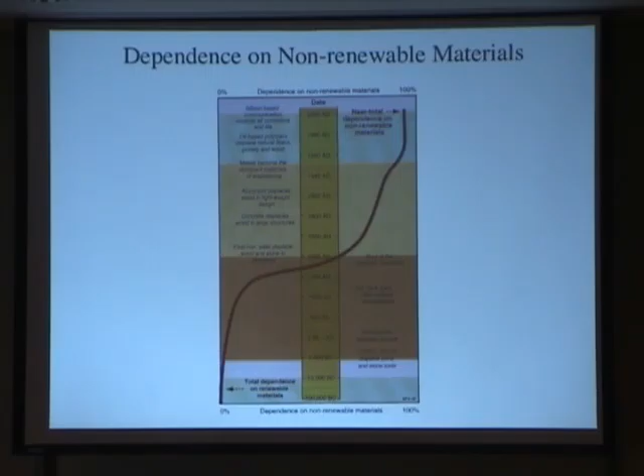But today, what I really want to focus on is, what does the material scientist do? What's our role in energy consumption? We'll see a couple of examples, and I'll explain some methodology. So first, we'll start with a quiz.

So this is a bottle of an imaginary spring water, Alpure water, invented by Mike Ashby. So here's what we're going to do. Here's this bottle, right? We're going to synthesize the polymer, then we're going to mold it into the shape of the bottle and, of course, the cap. We'll take the empty bottles, we'll fill them with French spring water, we'll drive them 550 kilometers to Cambridge, England. We're going to refrigerate it and serve it to Mike Ashby at lunch, at high table, and then recycle the bottle.

So my question to you is, filling itself doesn't require much energy, right? But in terms of these others, where is the big energy hit? So I'll call for some votes. Now, by the way, everyone agrees that recycling is good, so we'll come back to that. We're going to make the polymer, mold it, ship it, and refrigerate it. Those are your four basic choices.

How many votes for synthesizing the polymer being the big energy cost? How many votes for molding it, which is a thermal process, molding it into a bottle and cap? Okay. How many of you think that shipping it to Cambridge in a truck is the big hit? And how many of you think refrigerating it matters? So you're a good audience, because a year or two ago when I did this quiz, everyone would vote for the truck. They said, brain dead, driving it in a truck, 550 kilometers.

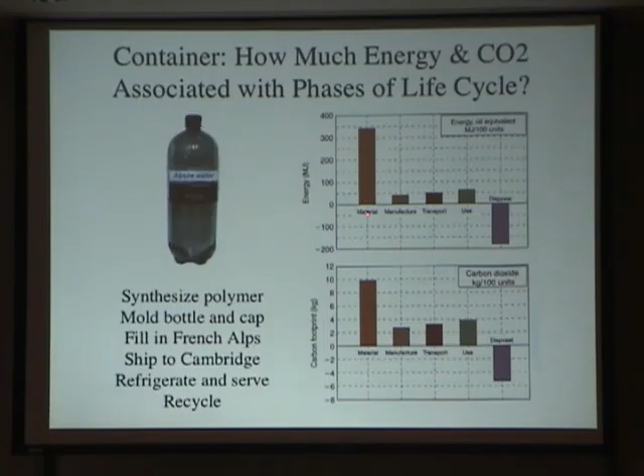So it turns out if you do the analysis to about 1 digit of precision, making the polymer, synthesizing the polymer in this example is the big hit. You know, these polymers are directly derived from fossil fuels. So you are, by the way, not burning the polymer, right? You're not releasing all its CO2 to the atmosphere. But this thing is basically made of fossil fuel. Making it into a bottle is there, but not enormous.

It turns out, if you load an 18-wheel truck, even though it seems crazy to drive water from France to the UK, the energy hit's about that big. This is the refrigeration. Putting the stuff in the refrigerator and cooling it down for a day or two is more energy than it took to drive it from the French Alps. And we can convert this into the equivalent carbon dioxide emission, and these are both for 100 bottles.

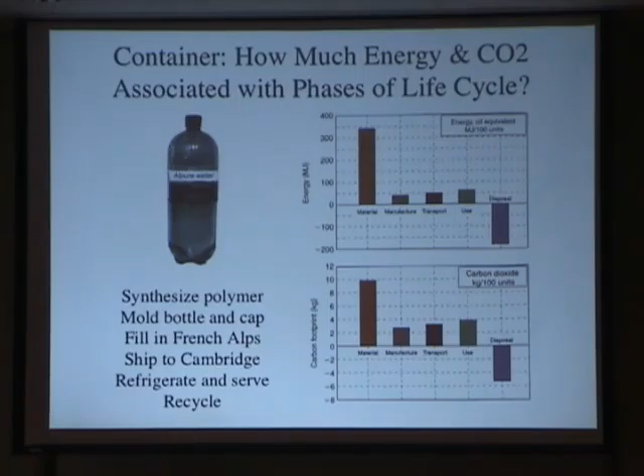By the way, there's a credit over here. This represents the credit that the next person would gain if you could recycle the polymer. In other words, this negative figure represents energy you would not need to commit to reuse that polymer. You do commit some energy to collect it, chop it up, soften it, and reprocess it. I will later explain where these little charts come from. They actually come from a piece of software that Ashby and Company have created, which is very powerful.

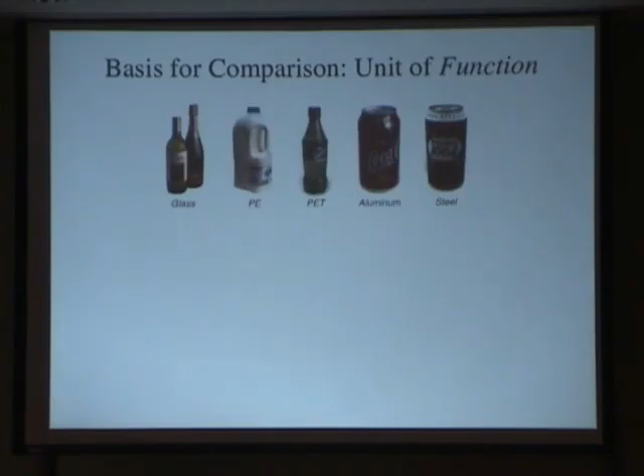Well, one point, I may be preaching to the choir here, is how do we compare choices? So we talked about a bottle. Here are a variety of familiar bottles made with a variety of familiar materials. So if I push the button and say, look, if you're an energy person, we should talk about the energy consumed to make these materials. Here is the energy to make 1 kilogram of polyethylene terephthalate, polyethylene, glass, aluminum, and steel. So you look at this and you say, glass is the winner. I love glass. But will glass be the winner?

So the question is, really, per unit of function, which is holding liquid. So an aluminum can, you know how thick the walls are in an aluminum can, right? You can just crush it in your hand. How thick are the walls on a glass container? Right? Much, much thicker for mechanical reasons. So if we convert this plot into the energy of material needed to make a bottle to hold 1 liter, this is now the comparison. So glass, which was here, jumps way up simply because of the necessary wall thickness.

Interestingly, our all-time winner is steel. This is steel with a very thin lacquer coat to make it not corrode. And steel is recyclable. It turns out in this study that our friend steel comes back several times as a surprising winner. However, there is one other property not listed on the slide which makes glass different from all the others.

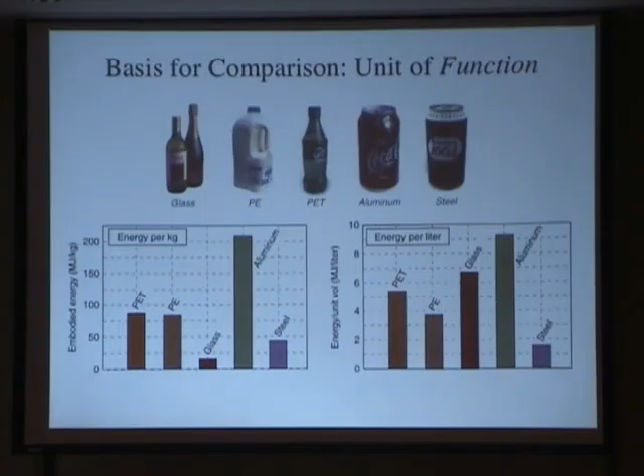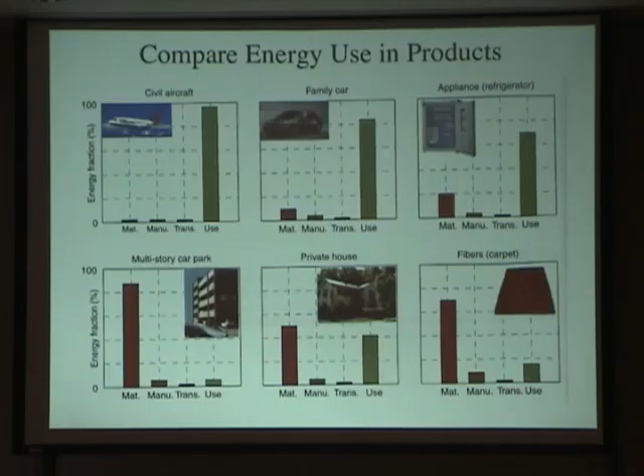And the comment here is related to the question of life cycle analysis. It's very easy to encounter life cycle analyses where the viewpoint, that is the input and output gates, surrounds one piece of the process. For example, I go to Boeing. I draw a mental line around the Boeing plant, and I say, how much energy do you use? That viewpoint would lead you to say, well, boy, you better not up your energy consumption by a third fooling around with these engines. But you'd have the wrong answer. The LCA must surround the entire question of system use.

Now, what do we do in the class? How do we approach this? Mike Ashby and a software house, which has been around 20 years now, had long since had a database of materials properties for engineering. What they've done in the last 10 years was to put in what they call eco-data, derived from a variety of sources. There's a lot of interpolation. It's actually done with a careful statistical method to look for data that are outliers and not accept it naively.

So the current range of numbers is around, the average is about 220 megajoules per kilogram. So how do we think about that? Let's take a familiar unit of energy, the kilowatt hour, right? Here's your toaster. It's 1,000 watts. You turn it on, click, gets real hot, and you leave it for an hour. That costs you 10 cents. That is 3.6 megajoules. So we're talking here something like 70 kilowatt hours.

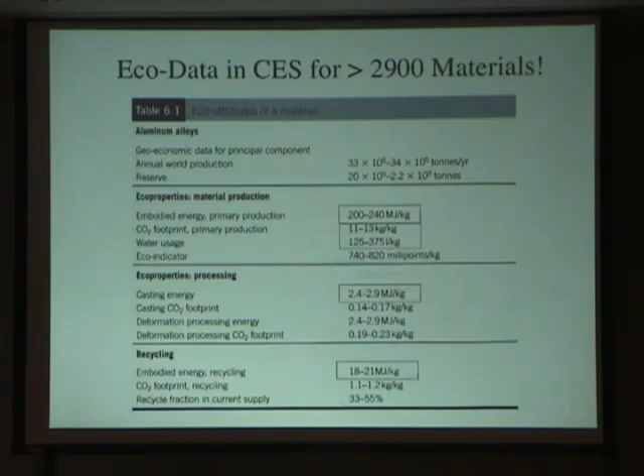Now, this is the longest slide. I have to lay out the steps in how we would figure out our problems. This is phrased in terms of, suppose we were designing something or redesigning something. So consider a proposed object or system. What do you need? You need a preliminary design that achieves the function, right? I'm building a bridge. I'm building a race car. I'm building a solar thermal Trombe wall, right? Okay? And sets necessary constraints, right? How big, how stiff, how heavy, how much thermal conductivity, whatever the constraints need to be. And I break it down into its components, and now I have to say, in engineering terms, what do I need?

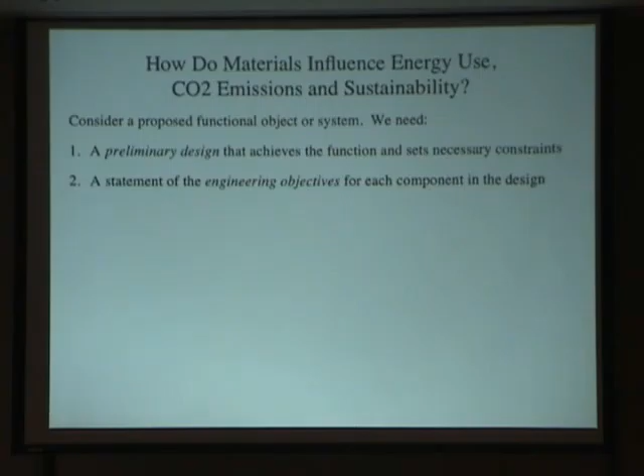And here's the interesting part. You need a methodology, which I'll show you in a moment, to calculate a figure of merit for each component. How would one material work versus another? So it turns out you almost invariably end up using certain ratios of properties. Occasionally use single properties. A lot of things are ratios. Once you've done that, can we also convert the figure of merit into an ecological implication, like embodied energy, CO2 footprint, even water consumption? And then trade off, because in part 3 you were an engineer saying, okay, I'm making this as light as possible. And in part 4 you were an ecological engineer saying, hold it, let's keep that embodied energy down, or keep that CO2 footprint down. And these will not, in general, have the same solution. So what do you pick that makes you pretty good in both?

And finally, we've already seen examples. We need a method to estimate in advance what a life cycle cost would be. Traditional LCAs are done on already existing systems that have been functioning. So you analyze after the fact what you did. But for design purposes, to move forward and make progress, we have to anticipate to maybe 1 digit of precision. Right? Is this new design really greener than the old one? Now, even if the numbers we have available only have 1 digit of precision, if we're going to make a difference, our new designs have to be not 5% better than our old designs, not 10%, but like a factor of 2, or at least a factor of 50% if I'm going to bother, right? So we will be able to make precise decisions with less than perfectly precise data if the difference is big enough.

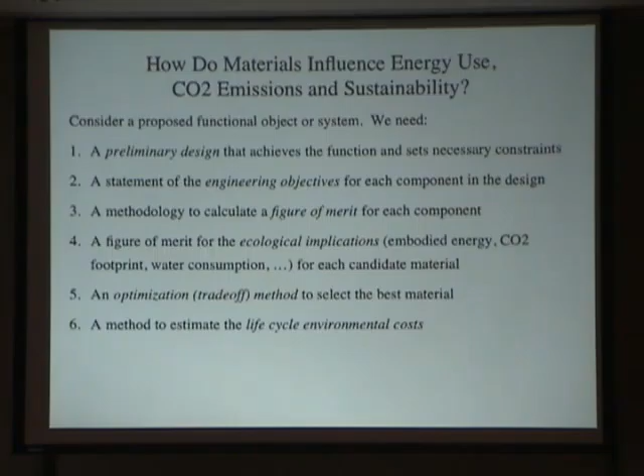So lots of you are engineers, right? So this will be fun. Let's consider, maybe you're ready to build a bridge. So you have beams and they're going to bend.

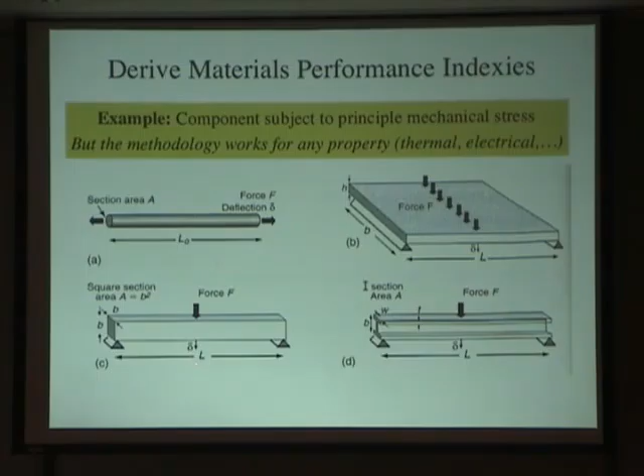So here are some different things. A rod in tension, a beam, a bar in bending, or if I'm clever, an I-beam, I for Illinois, I suppose, I-beam in bending, or actually a sheet in bending. And what I'll be interested in this example is the stiffness. I press on it, and how far does it deflect? So here's what we'll do.

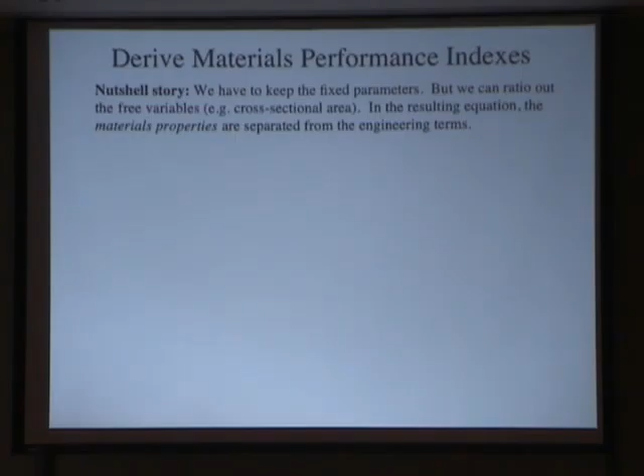The nutshell story. We defined the fixed parameters, like how long is the beam. But I may not have fixed in advance what we call the free variables, like the cross-sectional area. So we anticipate I could use a material that's really, really stiff and really dense with a small cross-section. Or I could use a material that's a lot less stiff and a lot less dense. It would have a bigger cross-section. So my beam has the same stiffness when I load it, but I've used either a massive stiff material or a not very massive, not very stiff material. And we need to know which one comes out ahead.

Sorry about all the equations, but here it goes. We know how much it weighs. That's the volume times the mass density. Very good. And we look up in our mechanical engineering books the stiffness, and it's these collection of figures. E is the modulus, that's the materials parameter. So here's what we do.

I have area in the stiffness equation. I also have area in the mass equation. Now I said the cross-sectional area I could vary within limits. So let's ratio it out. And we end up with a single equation by putting this together, the mass equals this bunch of constants. So the first two terms are things that are predetermined. It has to be a certain stiffness, has to be a certain length. C is a constant depending on how you put the load on it, distributed or one point. And everything having to do with the material pops out at the end. Mass density divided by square root of the stiffness, which is the Young's modulus.

So what does this mean? This is the material's parameter. If this number is the same, very dense and very stiff, not so dense, not so stiff, my beam would have the same mass. But again, the cross-sectional area would change.

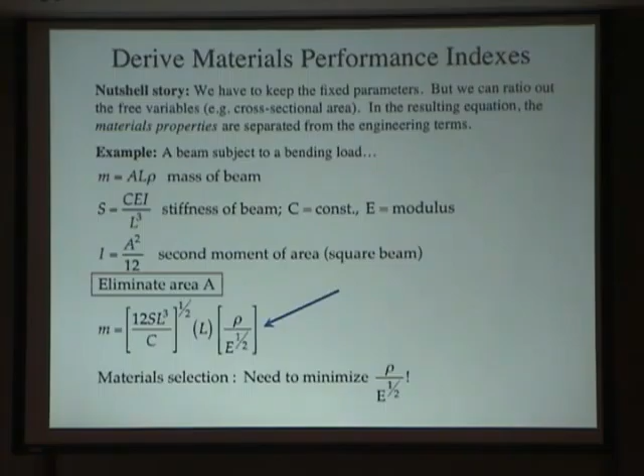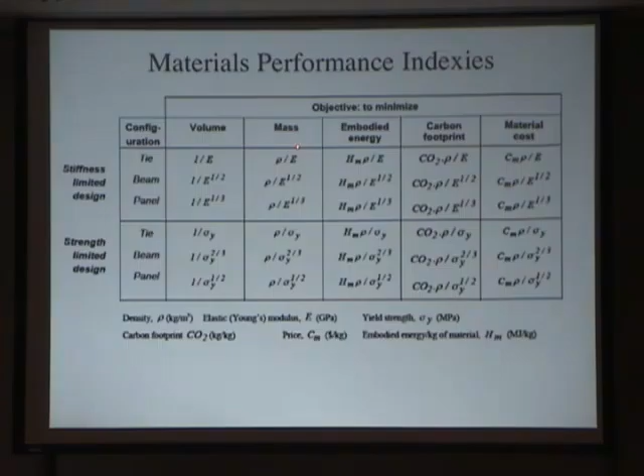By the way, if you do this for various situations, it turns out different parameters pop out. For stiffness, if it's just tension, it's 1 over this modulus E. If it's a beam, there's a square root. If it's a panel in bending, it's a cube root. So all of this just comes out of the mechanical engineering equations. If it's strength limited, you get first power, 2/3 power, 1/2 power. Okay? We could minimize the volume using these metrics, minimize the mass using these metrics, and I'll come back to the others. So let's look at a plot.

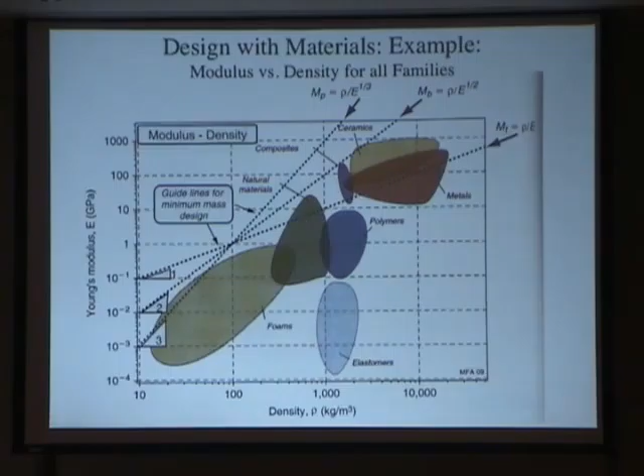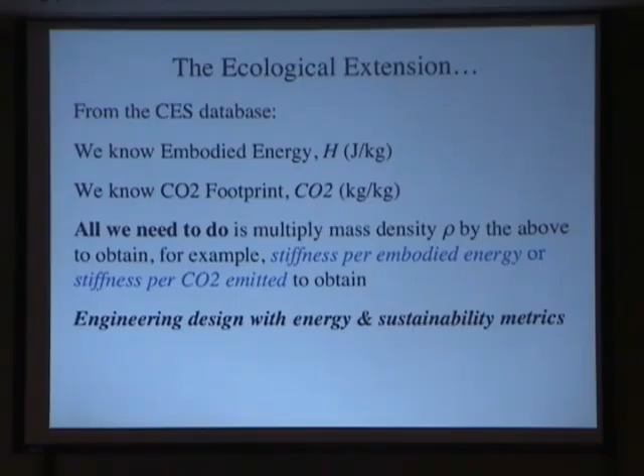Now, we previously had mass density. That was rho. If you have reliable numbers for the embodied energy in, let's say, joules per kilogram, or the CO2 footprint, kilograms of CO2 released per kilogram of material you made, all you do is multiply the mass density in the previous equation by one of these numbers. Now you have a new world, stiffness per embodied energy, or stiffness per CO2 emitted.

So let's redo the plot, now wearing our environmental engineer hat. Here it is, and now we have more specific materials indicated. We still have lines with these slopes, 3, 2, and 1. This one is embodied energy, but the winners and losers have changed. Because now, previously my criterion was which beam or shell would be heaviest, or lightest, I should say. And here the question is, which one will have the lowest embodied energy?

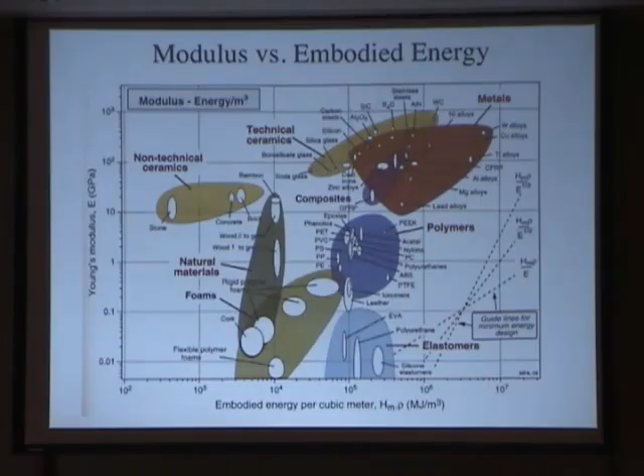Here now, a lot of the natural materials turn into the winners because they're grown by sunlight. The energy invested to cut down a piece of wood, dry it, run it through a lumber mill is really peanuts compared to the energy required to come up with a piece of aluminum. So, in technical terms, this is really cool because you now see what all the materials do and you see where you'd want to end up.

And the database, the CES database, has all these numbers, and its plotting routine allows you to input anything versus anything. And I'll show you an example later for architecture, where we come up with the variables that matter for a particular problem and plot it and do the trade-off. So let's do a little example.

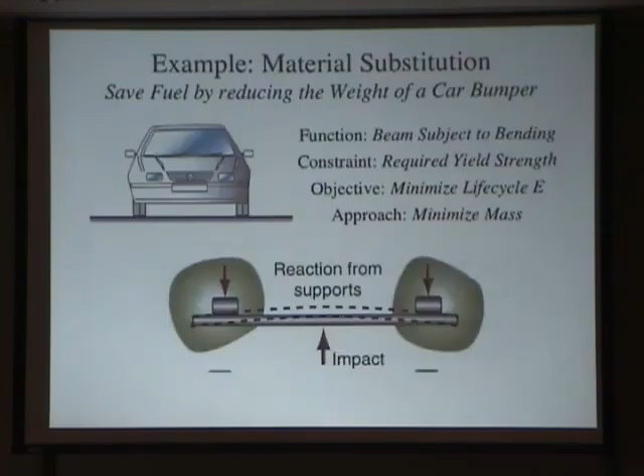Suppose we want to save fuel in an automobile by making it lighter. Okay? Automobile is something that moves. A lot of fuel consumption is associated with acceleration because you have to put the kinetic energy, 1/2 mv squared, into the car every single time you accelerate from a stop.

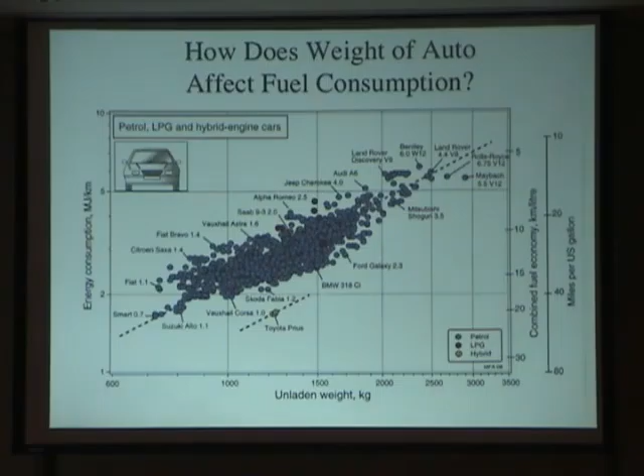So let's take a kind of low-level example. Let's suppose the car originally had a piece of steel as the structural part of the bumper, front and back bumper, 20 kilograms total, and we want to replace it with something else. It's a toy example, but it's very illustrative. What's the function? It's a beam subject to bending. So from top view, this might be the frame, and we're going to imagine an object hitting the bumper. I need a certain yield strength, and I want to minimize the life cycle energy. And I'm going to do that by minimizing the mass.

But now, if I replace it with steel, it does not have a very big embodied energy. If I replace it with something else, maybe you're a fan of high-tech composites, the energy cost of making the composite is quite a bit higher than steel. But it'll lower the mass, so the car will use less fuel. So it's a trade-off. So first, we ask, well, in an empirical sense, how much does mass affect fuel consumption?

Here's a bunch of plots. These are European cars. I point this out because there are not so many Skoda Fabias or Vauxhall Corsas driving around in Urbana, but nonetheless, from an average point of view, Ashby draws a line, a least squares fit, through the center of the plot. You could always say to me, well, this includes some fuel-inefficient vehicles. Maybe your line should be through the lower edge of the plot. In any event, we draw a line through and we extract what the energy consumption in megajoules per kilometer would be versus mass. Okay? And a car of interest might have a mass here, say it's 1,000 kilograms. So we're going to work up and down this local slope. We're going to improve our Vauxhall Corsa.

For purposes of time, I'm going to skip the messy equation that comes in. What we do is we say, consider the mass of a steel bumper to give a certain yield strength. Consider the mass of something else to give the same yield strength. And since I used that much of it, what is its embodied energy? So here we go. Here's the trade-off plot. 0, 0 is where we started. A not enormously strong run-of-the-mill steel.

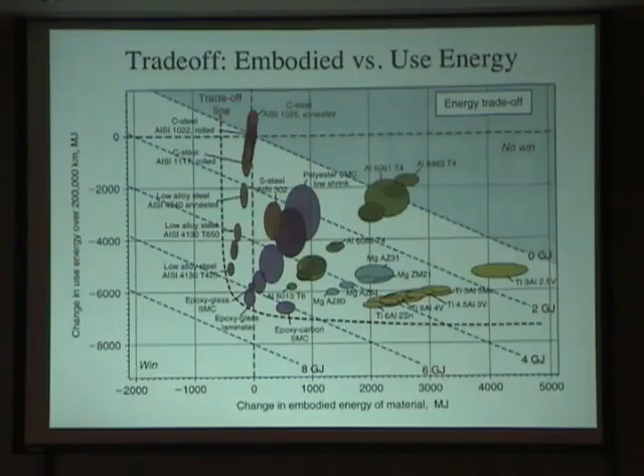And this is how much I would save. Up here, 0, I don't save anything. The aluminum bumper saves fuel, but has a big embodied energy. And so when you sum them up, you're staying on the 0 line. Well, so much for aluminum bumpers. I could pick titanium, and that has a significant embodied energy also, and it's a bit lighter, so that's good. But the next plot will show that the cost rules that out.

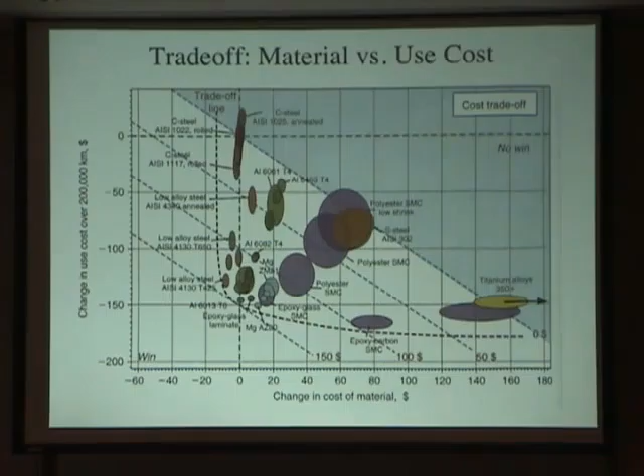Now I come down here to the sort of things that Amory Lovins and others say, right? High-tech composites. Here's epoxy carbon, epoxy glass, beautiful. They are down near the nose of the curve, which on this is called a Pareto trade-off surface, where we have the most savings. Great, we're probably done. But I do have a question for you. Are those composites recyclable? You recycle a piece of fiberglass? You can chop it up and use it for filler, and that's about it.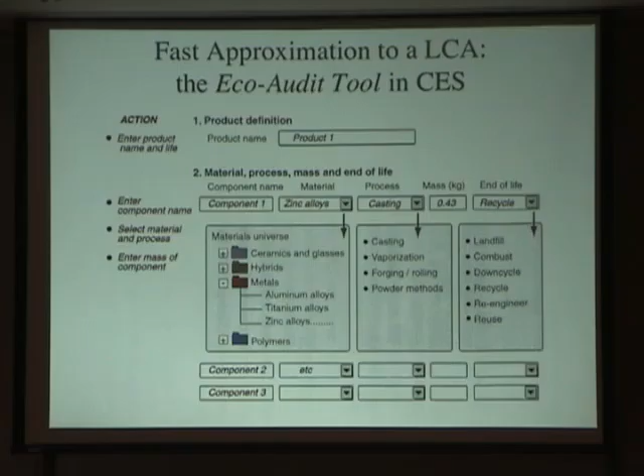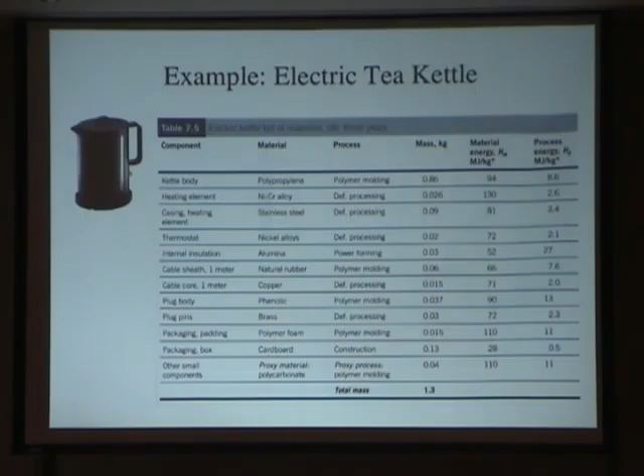By the way, in Europe, the Renault automobile company, in the last decade or so, switched the manufacturing of their cars. You know, there's the basic floor pan. It's the floor of the car, and then up front it turns into the engine compartment with the support for the springs. They converted all of their production to high-yield strength steels. I don't know if it's this one, but it's similar. The cars are a little lighter. The crash protection rating all went up to 5 stars, and they're all recyclable. So the ecological solution here was not to switch to, wow, a composite like my tennis racket. It was to go back and say, you know what, if we could increase the yield strength of our steel through clever alloying, we get to the same place.

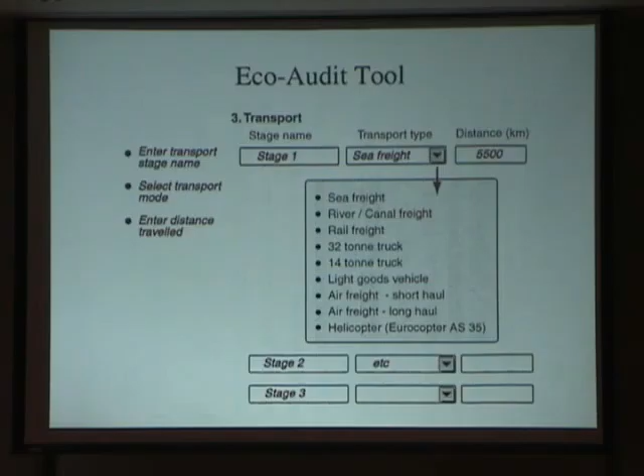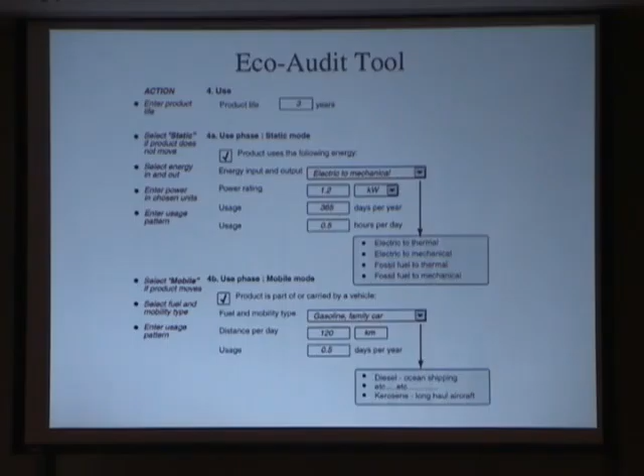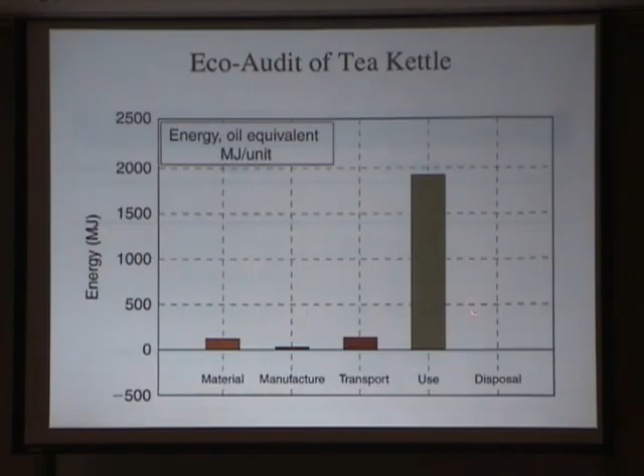Now, I alluded to this earlier. This is a little segue. Life cycle analysis performed after the fact is fine, but if I'm sitting here trying to design something, right, I need feedback now. So what this particular database has is what they call the Eco-Audit tool. It basically says the database has numbers for embodied energy, mechanical properties, and we'll also put in numbers for the typical energy to ship something by truck, ship something by ocean-going ship, and so on. Let's put it all in. So the spreadsheet allows you to just say, okay, what's this thing going to be made of? I'm going to use this material. This is how I'll make it. This is how much. Can I or can I not recycle it? And you keep adding stuff, right?

So for an electric tea kettle, for example, it's intriguing. This is the list of materials that's in the tea kettle, including, by the way, the packaging to ship it from China. So you have this whole bill of materials, and the database knows the embodied energy and the processing energy. Well, let's see. It was made in China, so it went sea freight, right, in containerized cargo, to the West Coast, then it went on train or 18-wheel truck. You can put this all in. The database has the typical number. Everything here is good to 1 digit of precision.

And if it uses energy, maybe it's electrical, maybe it uses a liquid fuel, you put that in. You know, how much time per day is it on? How many years does the thing live? And out pops data in whatever form you want, including the bar graphs I've been showing you.

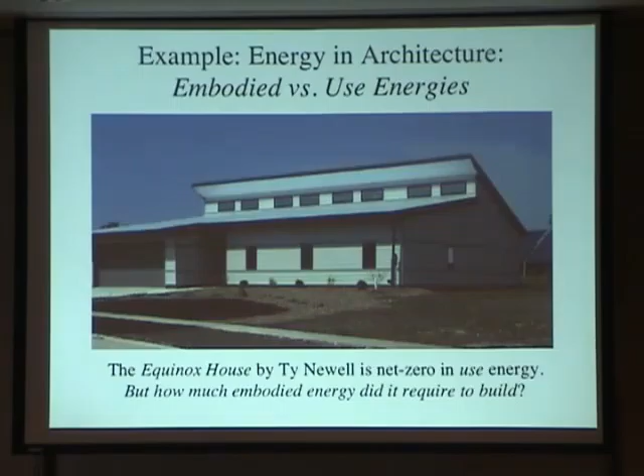So what do we want? A better insulated tea kettle? Maybe a tea kettle with a better level indicator. So if you need 1 cup of water, you fill it with 1 cup of water. Because if you're always, because, quote, it doesn't matter, filling it with 2 cups of water, you've doubled the bar here, basically.

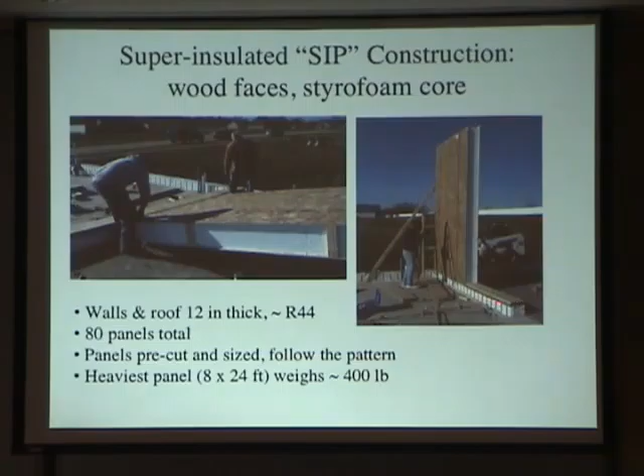I will wrap up with a comment about architecture. And some of you will recognize this picture. This is a house in North Urbana called Equinox House, built by Ty Newell, who's a retired professor of mechanical engineering. He's worked on solar and thermal problems his whole career. This house actually is, it's extensively monitored, net zero in use energy. Averaged over the year, it's truly net zero.

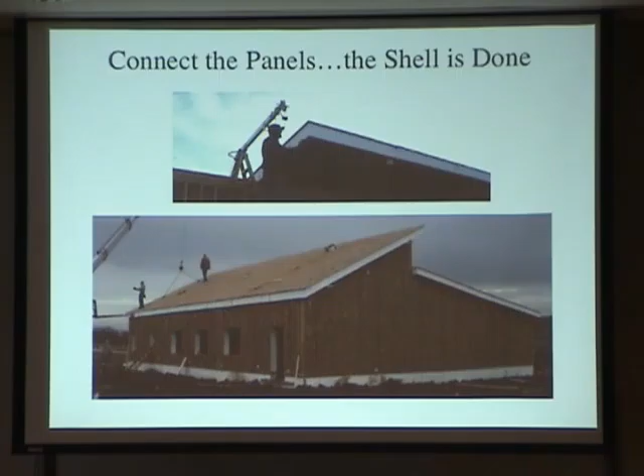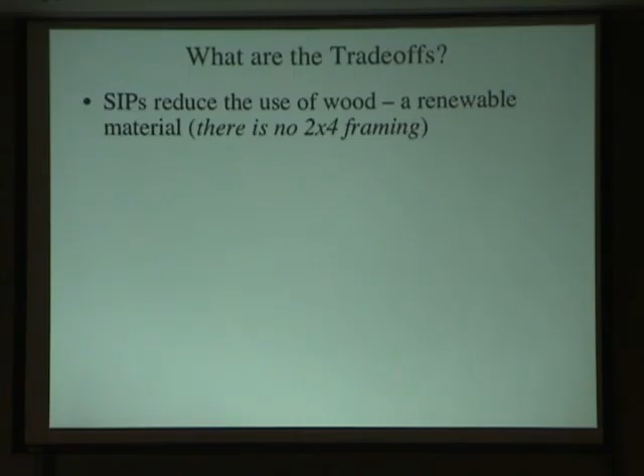And in back, he actually mounted his photovoltaic array separately, although it could go on the roof. And that's what generates electricity. So intriguingly, this is a solar house, but it does not have big windows facing south. So how can that be? So it turns out when Ty Newell works through the design, it turns out if you make a lot of windows facing south, you gain a lot of heat and you lose a lot of heat.

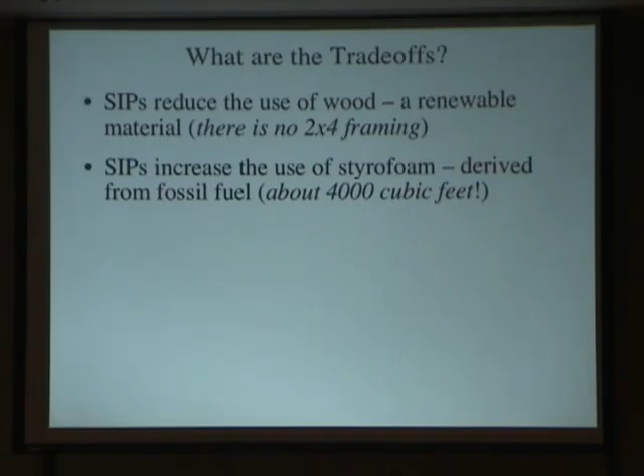So even a very high performance window, averaged, is really only about a 5% efficient device. The solar cells in back are about a 14% efficient device. They're driving heat pumps with a coefficient of performance between 2 and 3. So they, in effect, have a real efficiency more like 25%. And at today's prices, 1 square foot of triple pane glass is about $35, and 1 square foot of solar cells is also about $35. So Ty Newell, who spent 30, 40 years working on solar thermal, now says, I'm prepared now to say that solar thermal is not the way to go.

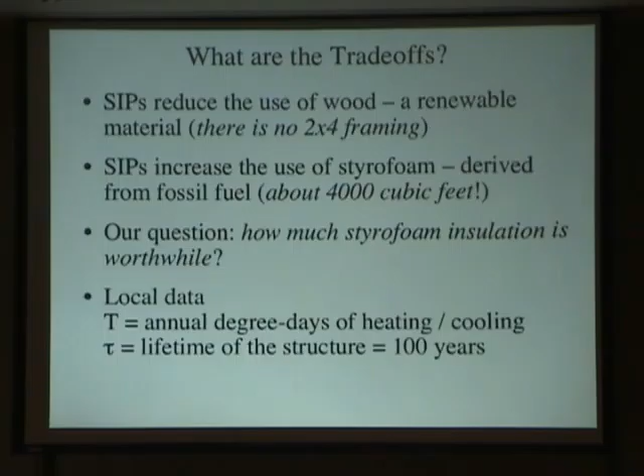He's designed a variety of houses. This one has a more unique look. The other ones look like totally regular houses. So how does this work? They're super insulated. So the heat loss is very low, and we use heat pumps and air exchange to take care of conditioning. But let's see what's inside. This is during construction. It's built not conventionally. It's built by structural insulated panels, which are wood faces and styrofoam core.

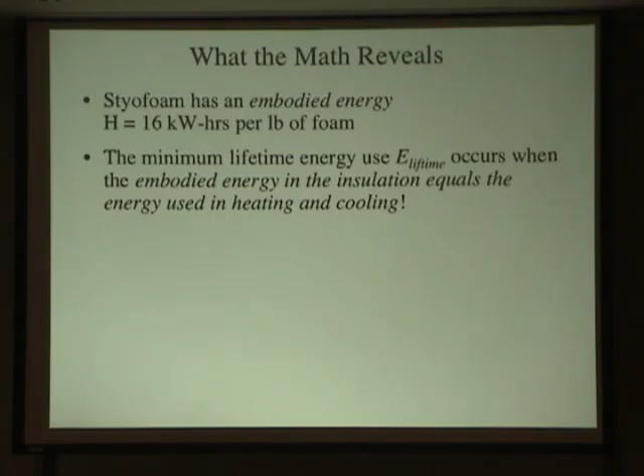So these are made in a factory and shipped to site, precisely sized for this house, right? So the foam in here is almost a foot thick. And you stand these things up, and you nail them to the footer. And it's sort of like assembly by numbers. You keep lifting these things off the flatbed truck, and you screw them in place, and not too many days later, the thing is done. Then, of course, you wrap it, and you have siding and roofing. But you'll notice the 2x4 framing has disappeared.

What are the trade-offs? Well, we've reduced the use of wood, which is, by the way, supposedly a renewable material. A conventional house we might insulate with fiberglass, which is not too enormous in embodied energy. And here we use styrofoam, a lot of it, like 4,000 cubic feet. And it's derived from fossil fuels. So how do we end up in this thing? How much is worthwhile? So let's do a little calculation which is very indicative.

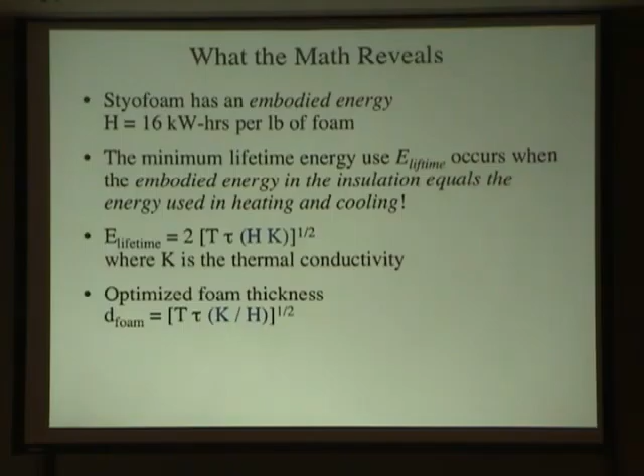We need some local data. We need an integrated number per year of the number of degree days of heating or cooling. So when the outside is significantly hotter or significantly cooler than the inside, this is the temperature difference across the walls, and we're going to have to either heat or cool to compensate, right? You read in the newspaper about how many degree days this month. And now, very critically, we have to assign the lifetime of the structure. So let's say 100 years.

So what the math reveals. Styrofoam has an embodied energy that's about 16 kilowatt hours per pound of foam. So I use kilowatt hours because this is, again, like your toaster. I'm going to turn on my toaster, click, kilowatts running there, and I let the thing run for 16 hours. And at the end of it, I have a pound of foam.

Not such a small number. Now, if you run a calculation, see, if you use more foam, there's more embodied energy, but there's less loss because the insulation value goes up. It turns out, somewhat surprisingly, the minimum lifetime energy occurs when the embodied energy equals the energy used in heating and cooling. One plot increases with thickness, the other decreases like 1 over thickness, and if you just minimize the sum, that's the result. It's surprising, but it's only about 2 lines of algebra.

And if you write that out, there are 2 equations that are interesting here. The lifetime energy turns out to be, this is the degree days, this is the lifetime of the structure, this is the embodied energy times the thermal conductivity under a square root. So I put in blue the material's performance. The lifetime energy is minimized if I can minimize the embodied energy to make the stuff and minimize the amount of heat leakage that goes through, the conductivity. So it's the product that matters, and I want both of them small if I can.

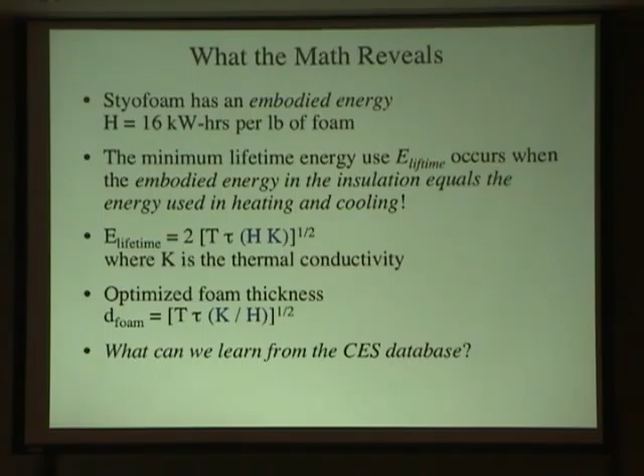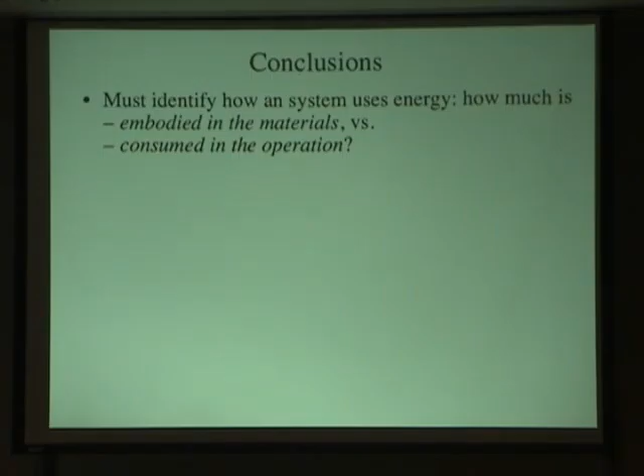Okay? So we face some fundamental trade-offs, and a big question here is, what's really the lifetime? So let me give you a little example. I took a picture of a new building going up in the corner of University and 5th just last week. Oh, well, I have a little more words here. By the way, suppose you consider polyurethane. Divide this out. This is the total energy, 8,300. That's embodied plus use. At 10 cents a kilowatt hour, half of this is use. It's $35 a month for operation.

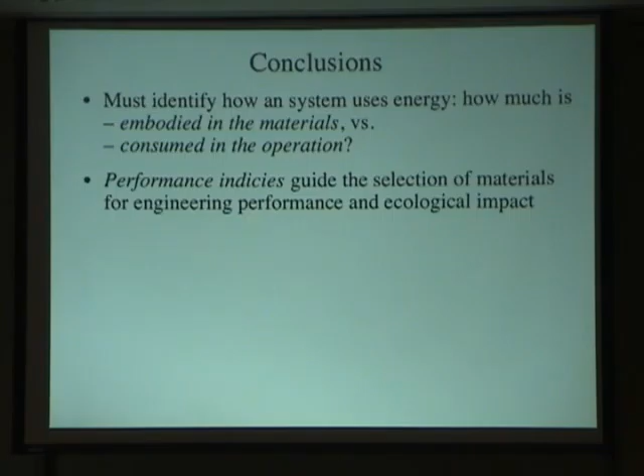By the way, if you go back to the previous equations, a possible way to think about this is you have applied a kind of discounting, economic or mental, to the time here, the effective lifetime. So if the thickness goes as square root of the discounted lifetime, and the thickness is, let's say, a factor of 5 too small, it means in your mind you've discounted the lifetime by the square of that. So from the developer's point of view, a 4-year horizon is forever, not 100. Right? But that building will probably be there for 50. So it's going to crank along for 50 years with that 1 inch of foam in it. Isn't that great?

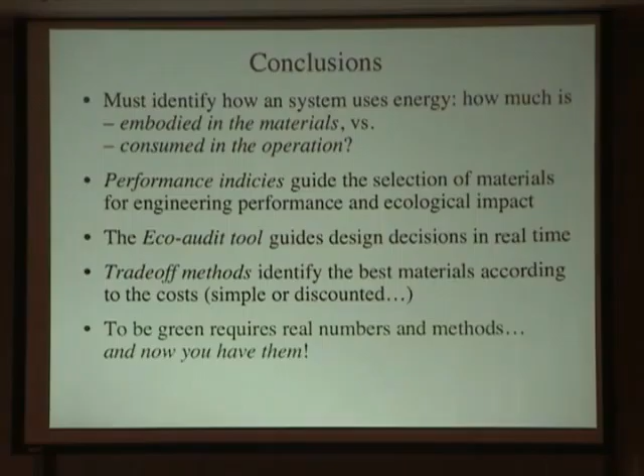Questions for John? But you didn't answer the question of whether Ty used the right materials or not. You have to assume the 100-year lifetime. That's a huge assumption. Yes, it is. Certainly, driving around town, we see a lot of homes that are 100 years old. We also see some that never make it to 100. There's also an end of life question. Are we going to toss away the styrofoam, or will there be, a century from now, 75 years from now, any method that makes use of it and recovers some fraction of the embodied energy? So

I should point out that on my plot of the total energy use versus various kinds of insulation, there was a curvature there, right? Some are better than others, but all of these are enormously better than not doing the insulation correctly. So if you move away from that optimum, for example, you could say, oh, too much embodied energy. Give me 1 inch, right? What you have done is said, I'm going to drop my embodied energy down, but your use energy is going to go way up. So again, if you just write out these two equations, the saddle point, the minimum, is where they balance, but they balance because you've dropped the use energy so far down. So if I called up the data from this house, you'd see if you shrink the insulation down, the use energy just gets fantastically high.

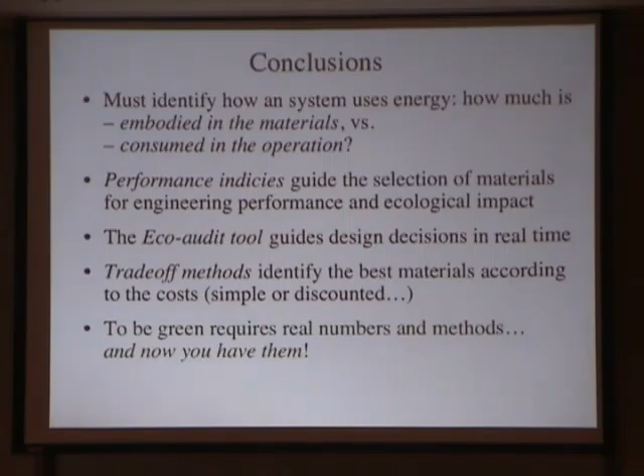So it's not a stupid choice, but you're asking me, I've done better with the 100-year assumption. Could I do even better? We could rerun this just putting tau in some number you like. 50 years? Or if you're an economist, you say, discounting. By the way, if you discount costs, right, let me just gesture. If you integrate benefit, if you have the sum of benefits per year, if you don't discount, let's say you're saving energy every year, it's a straight line. Right? Every year I'm not using a certain amount of fuel for heating. If you discount,

the integral looks like that, and in the long time limit, it goes asymptotically to the annual benefit divided by the discount rate. And this thing is dying quickly, so it's essentially flat. So if you're not a discounter, you say, hey, look, I'm saving forever. And if you are an economist discounter, then, right, that's the portion you want me to ignore. So,

the effective time, no matter how long the physical life of the building, if you're a discounter, and you say the discount rate is 10%, 1 over 0.1 is 10. You're telling me that in the benefit to cost ratio, the effective lifetime is 10 years. If this is 20%, you're telling me it's 5 years. So the example of the student apartment block that's being built, it works out to about 4 years discounted. So the developer has a 25% discount rate. Not necessarily in his mind, but what he's done effectively looks like that.

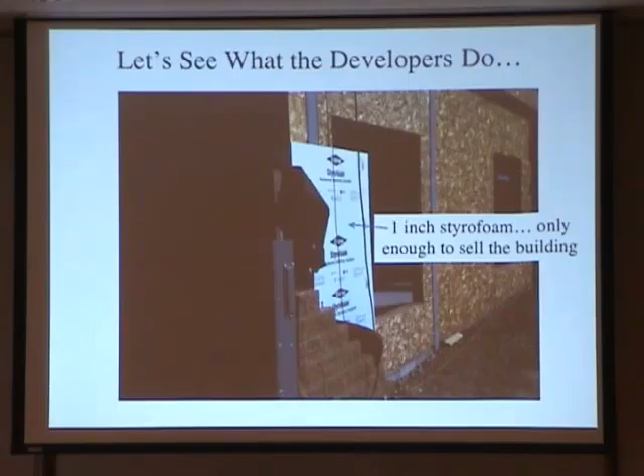Otherwise, we end up with things like this, right? The amount of physical effort to make that foam 3 inches thick is really close to zero. I don't know, a few kilobucks to increase the thickness of foam. Nope, can't do it. I'm the developer. It's not my problem.

Yes? I'm interested, does CES have straw bale in this database? The straw bale is pretty good. It's like cork. I think it's coming out in the new version. So you should run that on Ty's house, converting over to straw bale. Yeah, it's interesting, because then you don't have the recycling problem. No, that's right.

Straw bale is interesting. It has really low thermal conductivity. It also has low thermal mass, so it's good for insulating. It's not very good for smoothing out day-night temperature fluctuations by absorbing heat. It's good in the sense of not conducting it through. It turns out the class and I have just gone through the thermal calculations. You can maximize insulation. You can, as a separate parameter depending on the material, adjust the heat storage. In technical terms, this works out as a ratio of the thermal conductivity and the thermal diffusivity, which has the heat capacity in it.